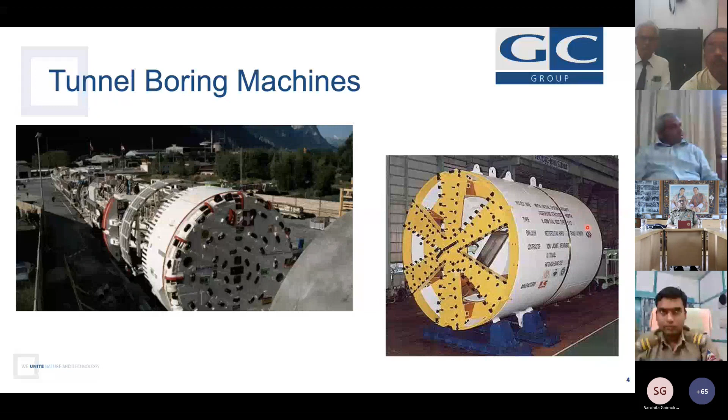Now, there is a whole range of TBMs, as we would call it. This shortcut DAUB means the German Association for Underground Works. They are part of the ITA, and they have already brought out some very comprehensive guidelines also on the choice of machines. And this is how they subdivide the different types of tunneling machines. I think this is generally accepted nowadays that this subdivision exists.

So we start on the top with tunnel boring machines. The first thing is the open tunnel boring machines, so-called gripper TBM, which would be used usually in hard rock. Then at the bottom here, we have the tunnel boring machines with a shield, or single shield machines, as they are called, for hard rock. So they are open machines. And then there is one thing which is very specific: so-called extension tunnel boring machines. This is when you have one smaller diameter and you extend it. For that, there are also specific machines. This I will not touch at all here because it's very specific and seldom used.

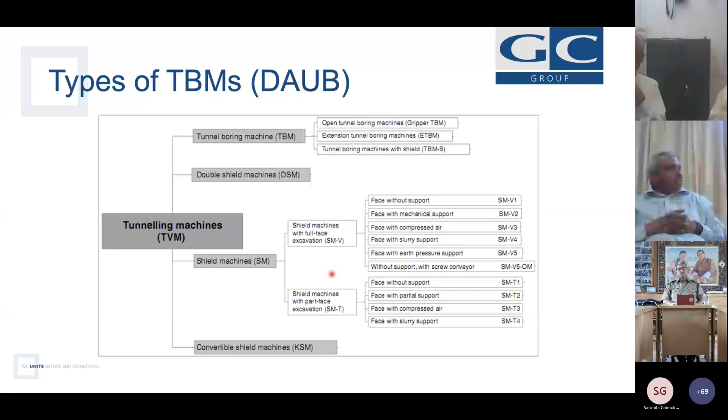Now this is what is called the classic open gripper TBM, which is used in hard rock tunneling. The specific thing is that the machine itself has grippers which fix the machine so that the machine can drill. Basically, the grippers are the abutment. They are pressed against the wall, the already excavated wall, and then the jacks are pushing the machine forwards. The cutter head is going through the rock. There is an overhead protection shield and an area here where rock bolts can be installed as a primary support. So it can be easily seen this machine has no segmental lining.

It can have a segmental lining, but it's not necessary. And the machine is pushing itself forward. So when these grippers are being retracted, these small feet stabilize the machine. The grippers are advanced, the whole thing advances, and the grippers again push against the wall. So this machine requires, because of that mode of working, very good rock. Because if the grippers cannot be fixed against the wall because the rock is too weak, then the whole machine will never come to performance.

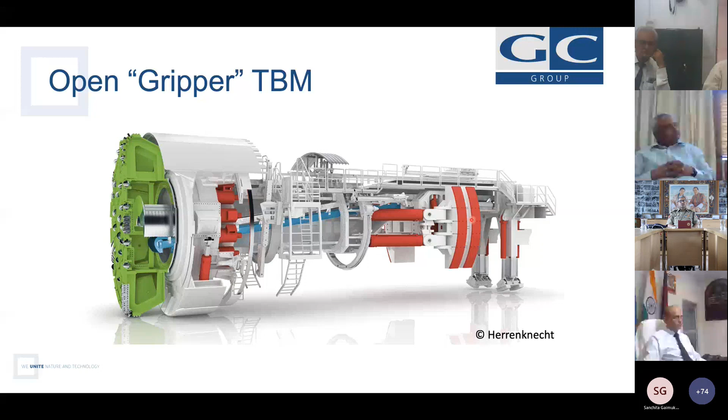Now this is the next type, already used in hard rock tunneling, the so-called single shield machine. Here we have segmental lining, and the machine gets its abutment for the driving from the segmental lining. So when this machine is used, a segmental lining is a must. I have to have it because it is integrated in my whole working, like in all the other machines. These machines are usually relatively short and strong. They can go through rock, mainly hard rock. What is definitely the difference from all the machines which are used for metro tunneling is that I have no face stabilization.

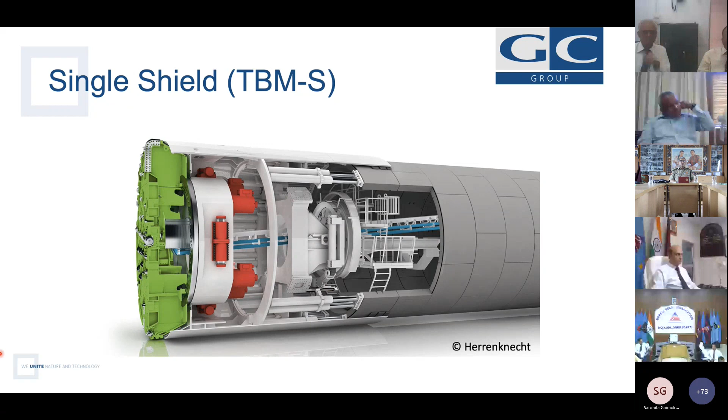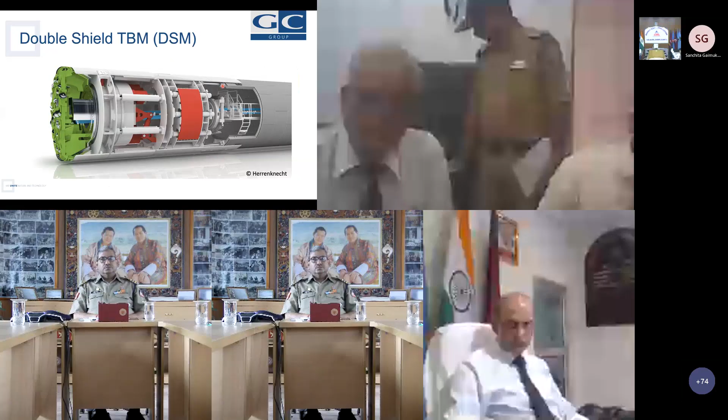Now coming to the next type, which is the so-called double shield machine. This type of machine is a mix between the classic single shield and an open TBM, because this machine has two shields and also a set of grippers. So this machine can work using the grippers against the wall. Then the grippers are fixed, the shield is pushed from the grippers forwards, and segment installation can be done in the back. But the segments are not necessarily used for pushing the machine forward. For that, we have the grippers. And if the rock is not favorable, so the grippers would not work, the machine can push.

Doctor. Actually, your screen is not being shared, I think.

What is happening? Oh, okay. Yeah, there was something. Okay, I'm sharing it again. No problem. I think now it's here again. Yes, now it's visible. Sorry, when did that happen? It just happened. Yeah. Okay, sorry. Okay.

Then very briefly, here are the grippers in the double shield. Here are the jacks, which can be used with the grippers for drilling. And here is another set of jacks, which can be retracted while the grippers are fixed. So segment building can go in one go during the drilling when the grippers are used. And if the condition of the ground is not good, one can also use the lining to push forward. The only shortcoming of that machine is that this shield is relatively long.

It's basically 2 shields. So if I have ground which has some time-dependent behavior, I need to have some measures so that the convergence will not catch my shield, especially the rear shield. Usually these shields are then a bit conical and the diameter reduces towards the end.

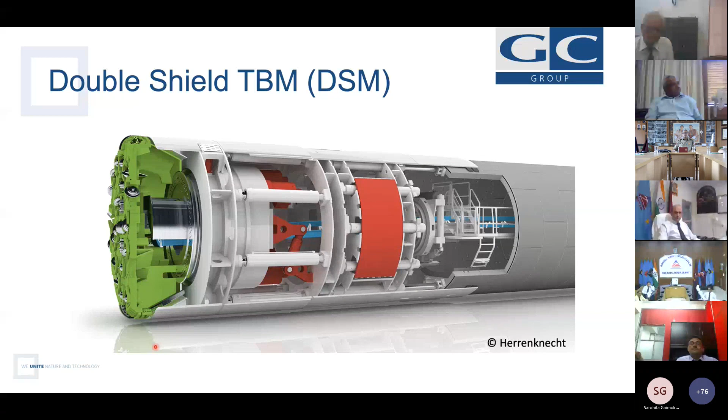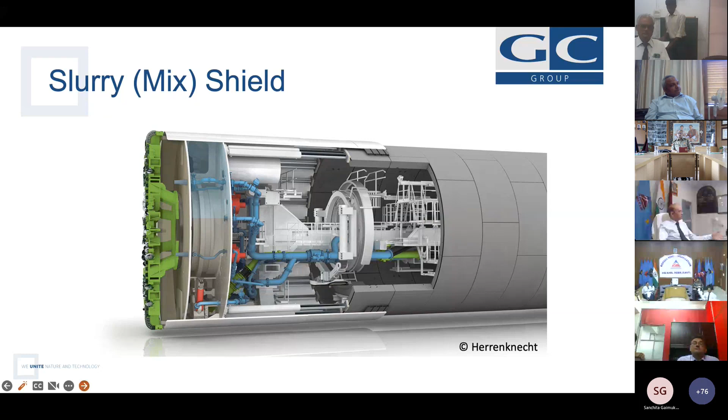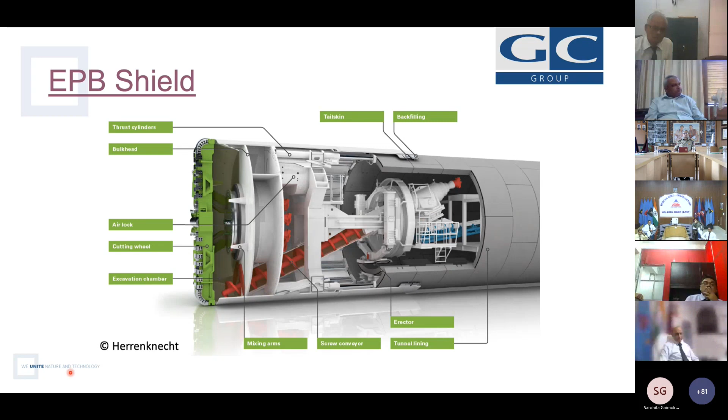On the other hand, as mentioned earlier, if I don't have water and I can go in open mode, then this is something I can do with the EPB, because if I have stable ground or rock in open mode and the rock is not too abrasive, I can muck it out with the screw conveyor also. Something that I cannot do with a slurry shield, which is always closed.

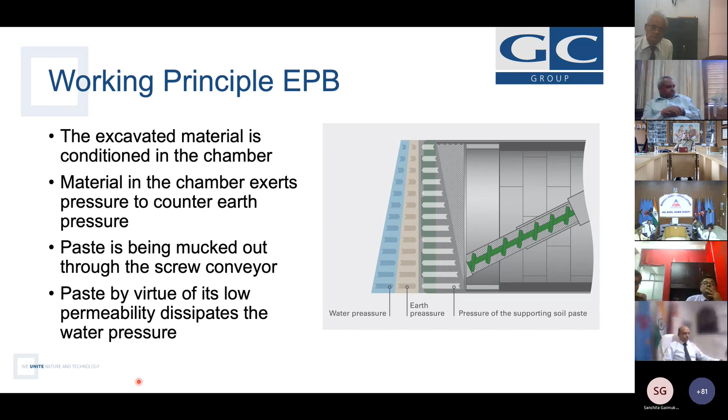So now, a short comparison, slurry or EPB. One thing is very clear. Slurry shields need a separation and treatment plant. EPBs do not need that. Then with the EPB, you're a bit more flexible with the mucking. With slurry shields, you have to muck through the pipes and they must be there. And depending on the ground condition, it can be that these pipes are also subject to wear and tear.

There was a project, not in India, outside India, where they had to basically do repair welding on the pipes because they were not there anymore. The material was so abrasive, and whenever you had a 90-degree bend, there was friction, and that took away the steel from the pipe.

And well, most probably because it is relatively simple to operate and also not much space consuming, EPB is the prevailing system that is used in India. So when you look into Delhi Metro, it was all EPBs. Mumbai Metro was EPBs and some other machines which had EPB mode and some other open mode. And I think only one lot used slurry shields. So one can say EPB is the more popular one, also coming from the constraints of space.

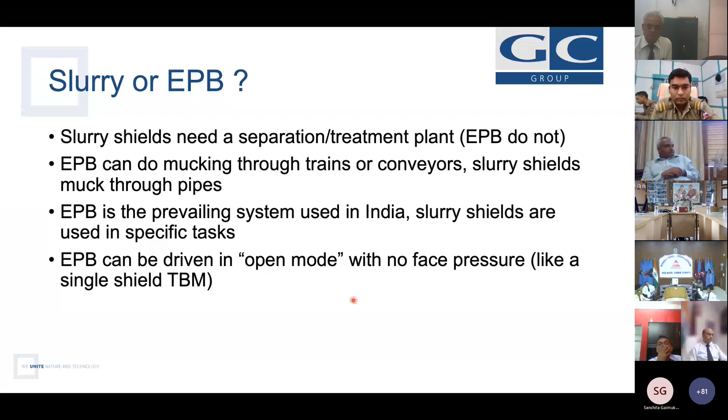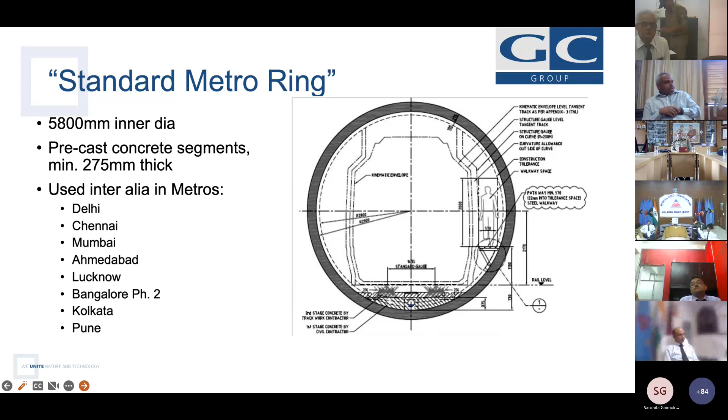Only minor deviations were there depending on the metro system. But this is how it looks like. It's more or less a standard SOD. So when it comes to this part, not much design study is required because these dimensions are already given. Only when requirements change, there might be a rework of that geometry. And usually segmental linings nowadays in metros are so-called universal rings. So basically I have a taper on the ring, which allows me to negotiate curves in horizontal and in vertical.

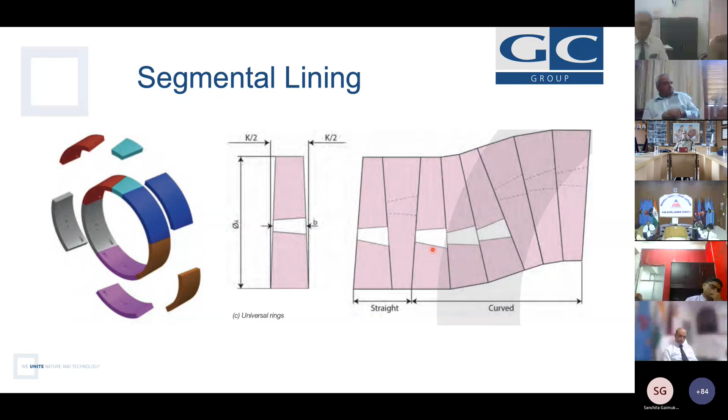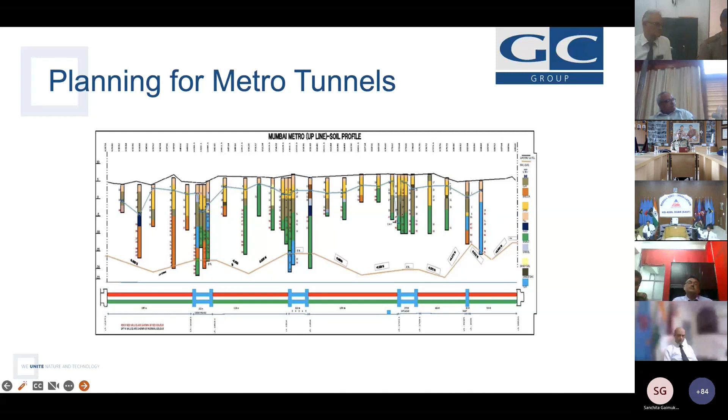So that's the first step, where the soil profile and the water levels are being drafted, being also shared with the contractors in the tender stage. The stations are being marked, and then contractors will start thinking, I mean, this is nothing to do with the geotechnical design, this is more logistics. How will I drive? And that is already an interface or a coordination work between the TBM contractor, the designer, especially for the launching and the retrieval, then the station designer, because he has to prepare each and every station for retrieval or launching.

Whatever space requirements are there have to be considered. So logistics play a heavy role in that whole driving sequence. And then comes also the decision whether you drive through or whether you basically retrieve a TBM and relaunch it. That makes a huge difference for the contractor. Maybe not for the designer of the TBM segmental lining, but for the contractor, it has a huge impact.

So, launching and retrieval is then done by separate shafts if it cannot be done as part of the station. This example shows Mumbai package 4, where in Siddhivinayak was one launching focus, and in St. Xavier was another launching focus.

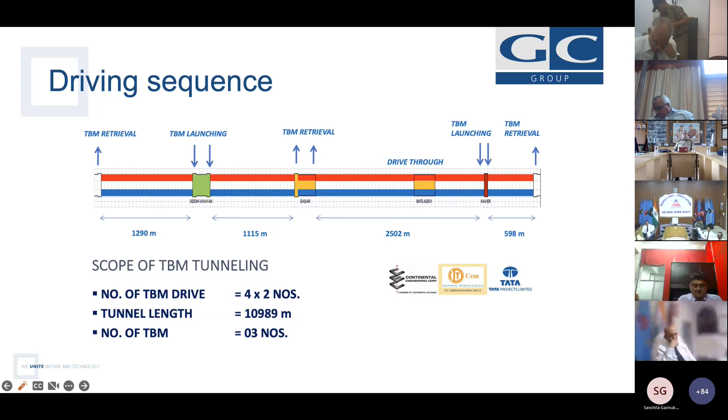And then, so to say, the point where the designers are coming in again. I mean, this L section is already stemming from a GIR, where all the drillings, the exploratory drillings, ground investigations are being collected, summarized, and put into a drawing. And not only this, in this drawing here there is a bit more inside, and I'm coming to that later. There are already recommended face pressures, maximum face pressures, tail void grouting, and air pressure for cutter head intervention shown. These are parameters which are coming from the design, as sort of recommended parameters, to give a range of values for a safe driving and safe intervention in the machine.

Because if you cannot, or if you don't keep that air pressure, the problem may be that you have water inflow, and depending on your ground, that water inflow may drag along also material. And in the worst case, instead of only maintaining your machine, you build a sinkhole slowly.

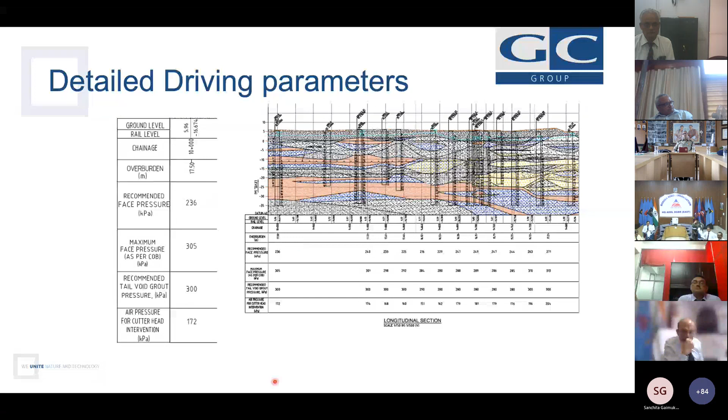Now, I think that was good enough for the introduction, and slowly coming to the metro tunneling. Now coming to the design tasks for the metro. I mean, we have two main things where the designer is putting his efforts in. One thing is the lining design, which is usually the more obvious, what everyone sees. But then we have also what I call the driving design, and that would be face pressures, grouting pressures, intervention air pressures, as already mentioned.

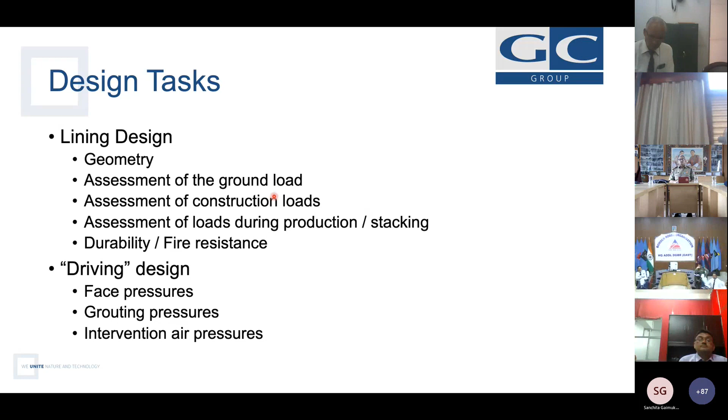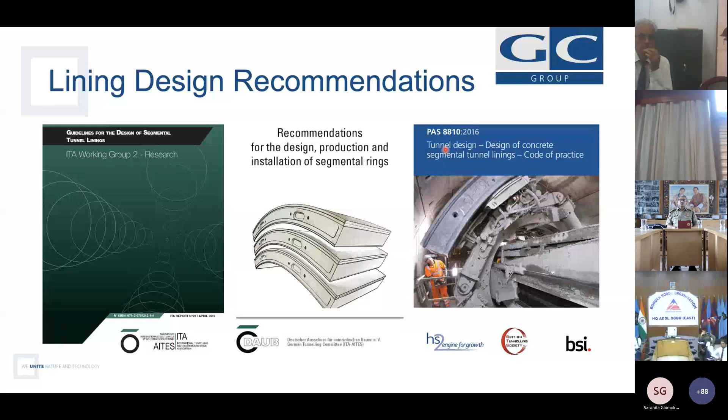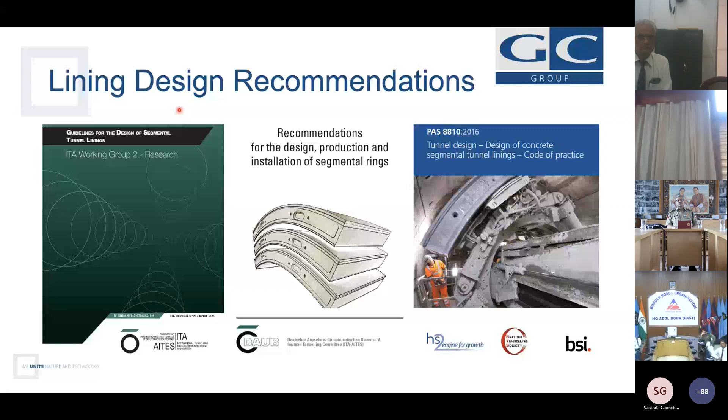Now, lining design, there is already a number of recommendations, and I can only recommend to go through them. ITA has published guidelines for the design of segmental tunnel lining. DAUB, which is also an ITA sub-organization, have produced recommendations for design, production, and installation. And there is a code of practice from the UK which is also dealing with the design of concrete segmental linings. So this topic is covered, and there is a number of sub reports which are there for precast linings with fibers, backfill grouting, etc., etc. So I would really recommend go to the ITA website because there is a really big collection of up-to-date papers.

Now, from the ITA guideline, lining design, what is to be considered? So it's not that we only look at the lining design like we would do in a cast in situ lining, where we look at the final product mainly, but here we have production and transient stages, which have to be considered in the design. Because it starts when we demold the segment, there will be forces on the segment during the storage, during transportation, during handling. And then this all is covered by some load factors, which ITA is proposing.

Then comes, after production, the construction stage. Now all our machines are pushing against the lining. So the thrust jack forces are one of the decisive loadings for our tunnel lining. Then come tailskin back grouting pressures, secondary grouting pressures, and in some cases, the TBM backup load, because behind the shield there is another 100 meters of backup with many equipments.

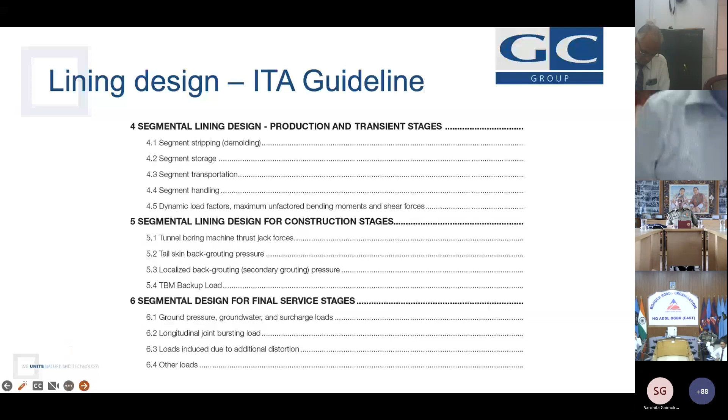And then under point 6, finally, we come to what we would usually see in the geotechnical design as our lining design. That is then the ground pressures, groundwater surcharges. Then in the radial joints or longitudinal joints, the bursting loads that are to be looked into so that they are not damaged. Loads induced due to additional distortions, that is to be seen always, depends on the driving, and other loads. So compared to a normal design of a cast in situ lining, we have two big areas which are, so to say, extra.

Now coming to that, we have the demolding done here with a vacuum lifter. Again, these forces have to be checked on green concrete. That's the thing where the concrete has no strength whatsoever, or very little, let's put it like this. Then comes the stacking. How much distance is there between the blocks so that there is no issue with the segment?

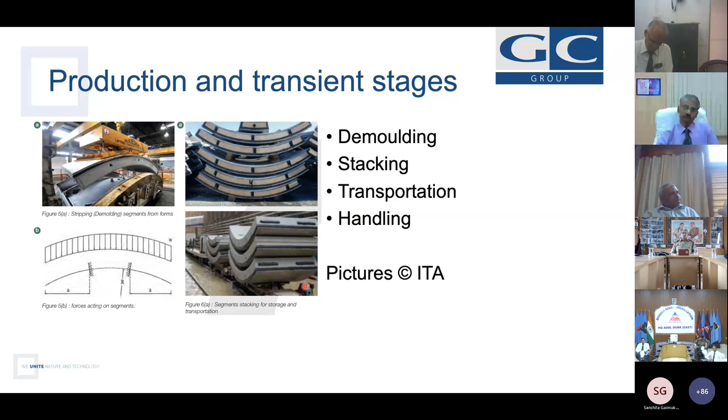Transportation and handling is basically to look also into these inserts which are there. Now, coming to the thrust jack forces, it's actually very simple what these forces are.

I'm having groups of jacks which are basically pushing my machine forward, and they are pushing against the rings. So I have relatively high forces introduced locally, and the segments should not break when under load. That means that I do have a development of stresses which I have to get under control.

And as written in the guideline, there are simplified approaches, there are diagrams, and even finite element analysis to get an idea how these jacking forces will load the segment and where I have stresses which are, so to say, disadvantageous for my concrete, because I'm still using concrete for my segments.

Concrete has a very good compressive strength. So in compression, there is usually no issue with these jacking forces. But then, together with the compression forces, tensile forces will develop. And that is the so-called tensile loading that has to be countered. Concrete itself, especially higher quality concrete, has a tensile strength. So in many cases, this is sufficient.

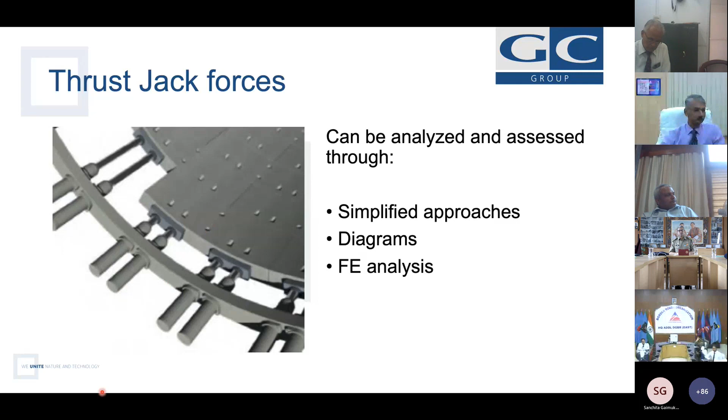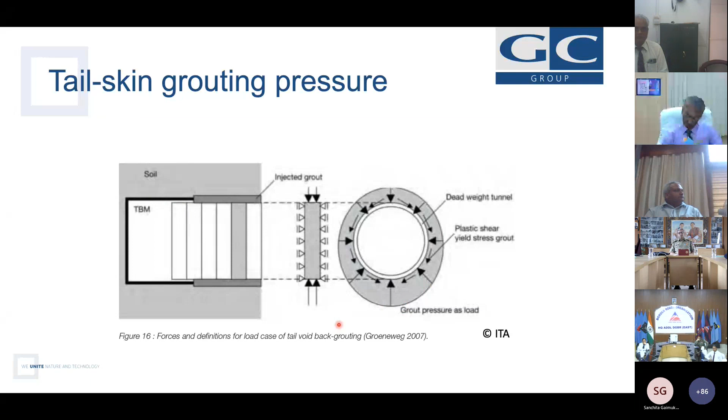Now the tail skin grouting pressure is shown here as a diagram, and usually it is not a very decisive load case because it is quite uniform, and in many cases this load case is already covered with the normal ground load. So good to check, but in this specific case, it will not have much impact. Let's put it like this: there are more decisive load cases, but there's one more important as a load case, and that is basically

And when you look at this, it becomes very clear that this also helps to mitigate settlements. Because if I'm having some voids and cavities above my tunnel, over time it will be filled with material, and that material can only come from above. So that means it will settle downwards. A proper backfill grouting can do some mitigation on the settlements also.

And the secondary grouting is usually done through the rings. There is a grout plug, which is at the same time a lifting socket for installation, and which has also a non-return valve, and through that grout is being applied to fill whatever voids are there around the segment. And each segment has one grout plug, so one can not only take one position, one can in total have 6 positions where you can grout.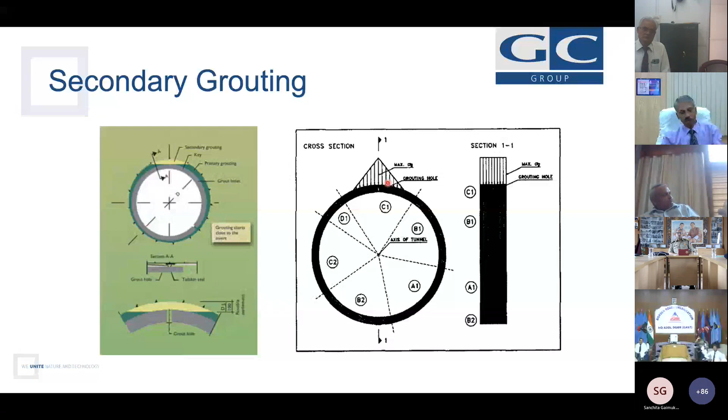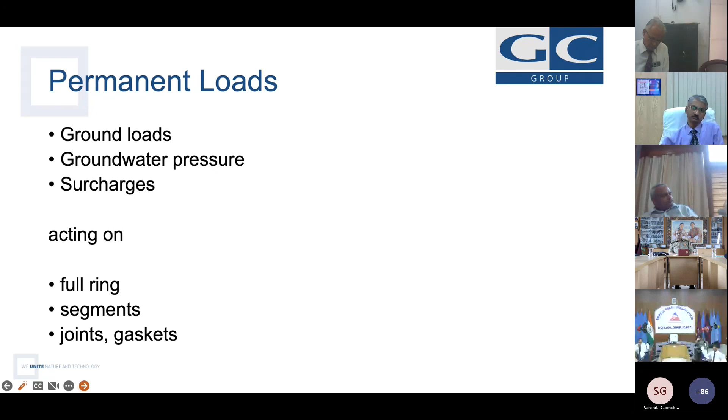Now coming to the permanent loads, which are there, like groundwater pressure, any surcharges, which is again something very specific for urban tunneling, that I have to assume that buildings are above my tunnel or buildings might be built on top of my tunnel, and they are acting on the full ring, on the single segment, and on the joints and gaskets. So all these have to be checked.

So now coming to the ground loads, there is some difference compared to what would be called the normal mountain tunneling outside the cities, because in many metro contracts, the ground load is to be taken fully. So that means there is no relaxation permissible. What we do in rock tunneling, that we say, okay, we let the material relax even in our design calculations, is not admissible in many of the major employers' requirements.

Then, when we take this whole thing one step further, the overburden and the coefficient of side pressure, the K0, determine our stress level, and also the uniformity in the sense that I'm having horizontal stresses and vertical stresses. And at the end, I'm having a segment ring which has to balance out these two stresses.

And one thing that I think cannot be overemphasized is that the subgrade reaction modulus, so to say, a value that is governed by the ground, by the stiffness modulus of the ground, the radius of the tunnel, and in some approaches also the Poisson's ratio of the ground, is another very, very important factor, because it basically describes what resistance segments would meet when they try to push into the ground.

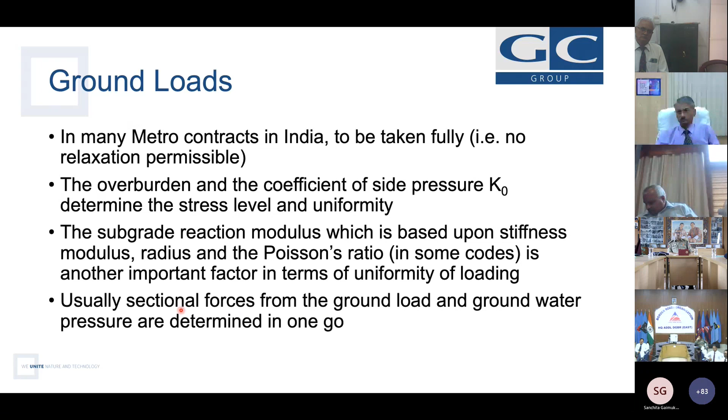Now, the accepted procedures which are being used for these calculations is in all cases an analytical approach, the so-called Muir-Wood equations. It's a paper from 1975 with a discussion contribution also from another engineer, Mr. Curtis. And in the German-speaking countries also there is a publication or several publications from Mr. Duddeck and Mr. Erdmann. These two gentlemen also had developed an analytical approach to determine the sectional forces in the lining. So the bending moment and the normal force.

Then the other accepted procedure is to make a beam spring model with any structural software, whatever is available. And one of the standards nowadays is that we have a numerical calculation either with finite elements or with finite differences to see what is the load and the sectional forces coming from that loading onto the ring. I have to say this is all on the level of the ring. There is no requirement to model each and every segment separately. And it would also not make too much sense because we have quite a good number of positions. So one has to run several analyses with no additional gain.

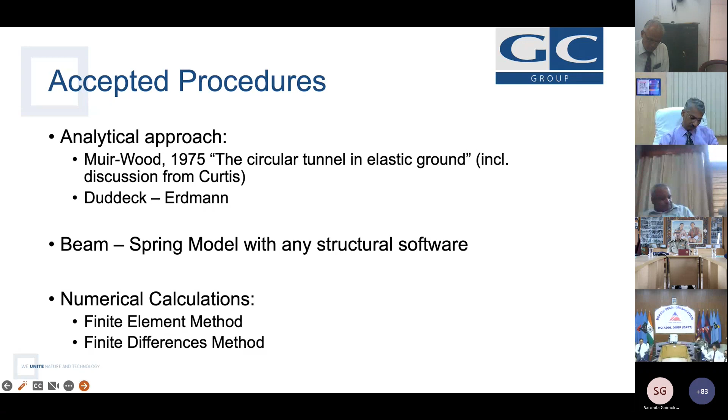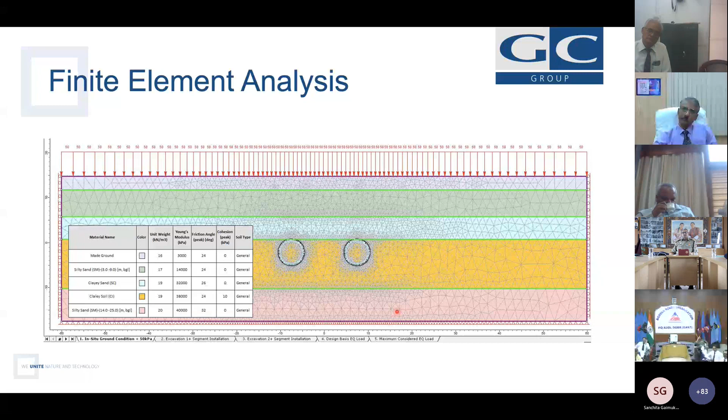So now coming to finite element analysis, this is the model for the twin tunnel before anything happened. Already the surcharge is shown, which is 50 kPa, which is a standard value in many metro requirements. And then we have, so to say, also shown here nicely the different ground conditions which are there with the material parameters, unit weight, etc. And that, so to say, would be the starting point for the calculations. And at the end of the day, as you might have seen already, this is the result.

In this case here, it's about the bending moment in two adjacent tunnels. This is something which can be done with the finite elements much better than with any analytical solution, because I can assess what happens in the first drive. Say that right-hand tunnel was the first drive. The first drive tunnel will get a bit more loading than the second drive because whatever changes between first and second drive must be endured by the lining of the first drive.

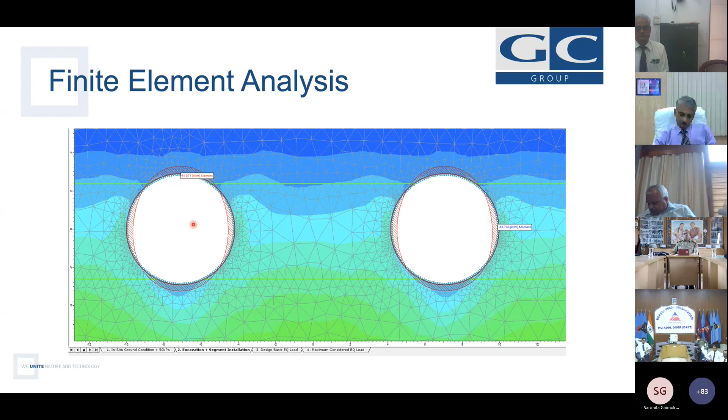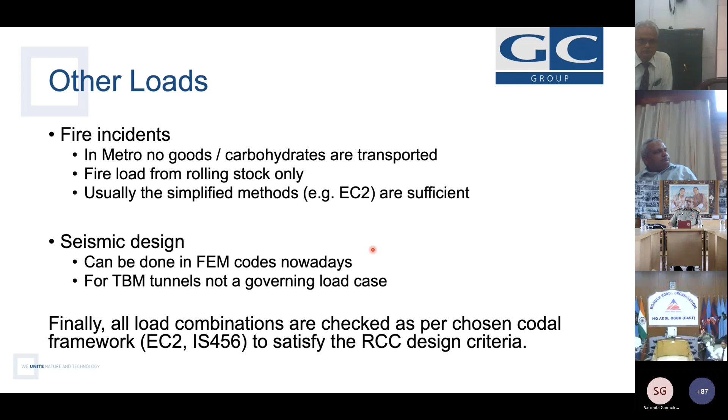Then the other point is definitely, well, sometimes under discussion, but seismic design is also there. And for that, again, the finite element codes do have some algorithms for seismic design. Usually it's not the governing load case for tunnels, also not for TBM tunnels, but it will be considered and should be considered to have everything in place and everything checked. Because it could be that we have local overloading, but no major instabilities.

So, once all these loads are being analyzed, being assessed, it's all put together in different load combinations, and they are then checked as per whichever codal framework is chosen. I mean, Eurocode is acceptable in many places, and the Indian standard for concrete can also be used for most of the cases to satisfy then overall the reinforced concrete design criteria. So these things have to be taken into account, because the next step is then durability considerations.

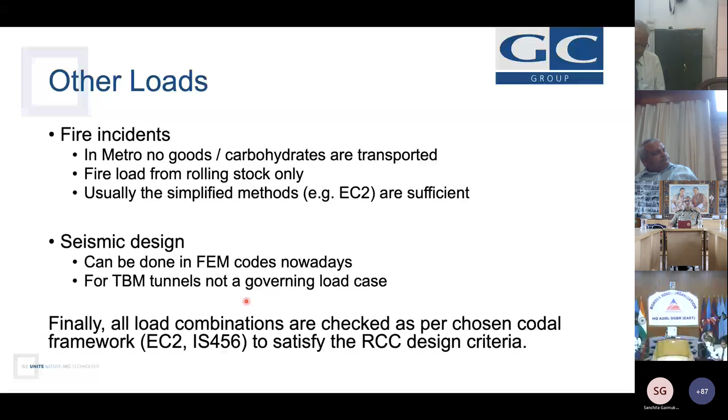I mean, metro tunnels are exposed to sometimes harsh environmental conditions, not in terms of temperatures, but in terms of chemistry. I mean, just imagine Pune and Mumbai, where you have salt water around, where you even have a little bit of salt in the air. So that has to be considered. The design life is 100 years. You cannot just repair somewhere below buildings, will not work. So concrete degradation and the corrosion of the reinforcement have to be mitigated. That has to be looked into. And the durability of the structures has to be ensured.

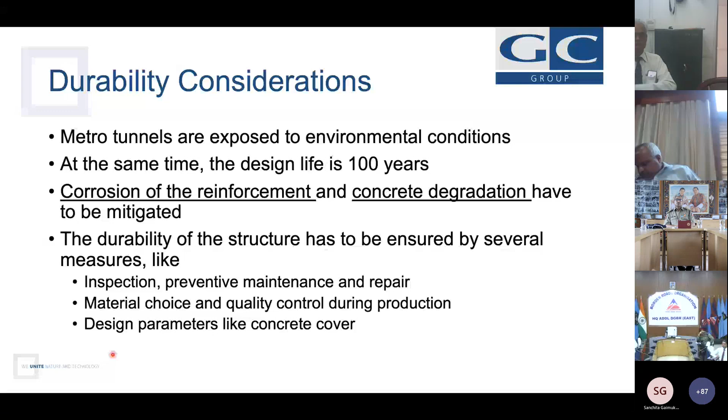And there are several measures. One thing is definitely inspection, preventive maintenance, and repair, which is something standard. Then the next point is material choice and quality control during production. That to some part touches the design, and then come things which are, so to say, directly in the realm of the designer, that is design parameters like the concrete cover, concrete mix designs, recommendations in this regard. And so there are codes which prescribe minimum covers. That is in the European code, the EN 206. And the British standard has the so-called BS 8500, which is, so to say, complementary to the Eurocode.

And there, basically, one is walking through a procedure where first the exposures are being defined. So am I in a saltwater environment? Am I in a marine environment? Am I in a normal environment? And from there, the whole process starts and one gets into the different exposure classes. And each exposure class then, together with the concrete strength class, will give minimum nominal cover, which has to be taken into account. Also cement qualities and cement types are being defined on that. This is quite a comprehensive document. And with that, going through that, already certain decisions can be taken.

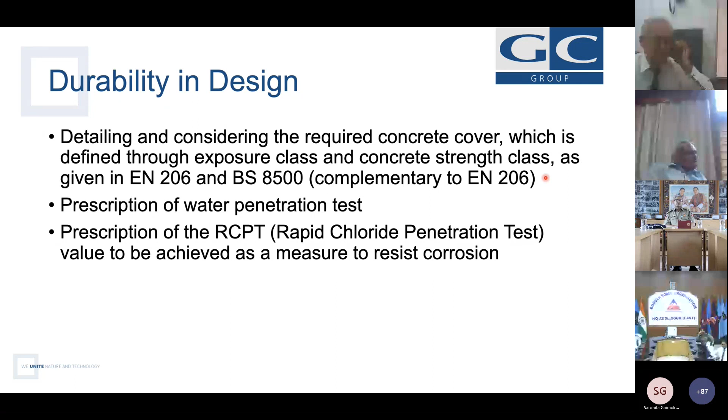Then comes the water penetration test, which was earlier always a DIN code. Then there can be in the specifications values prescribed for the rapid chloride penetration test, which is basically a test to see how deep chlorides can penetrate into the concrete. And usually that RCPT value is linked to the use of certain admixtures and components in the concrete, like silica fume, to ramp up the resistance against chloride penetration.

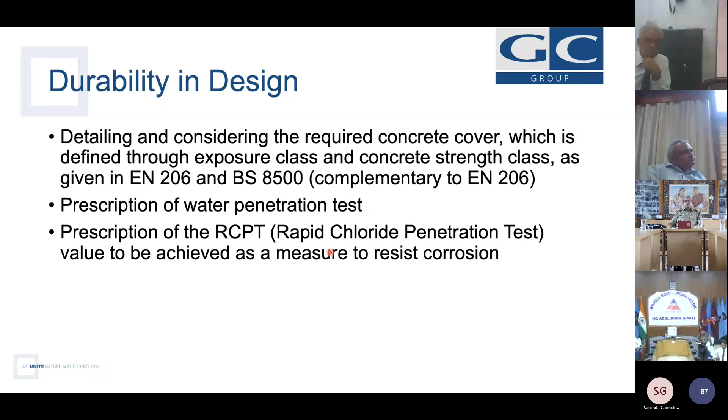These are also usually given in the employer's requirements. And then, when all this is done as per the codal provision, it may happen that clients ask for a durability analysis, and there is a software tool. The name is mentioned here. It's Life-365. It's free of cost. You can download it from the internet, and it basically allows you to analyze when you have a concrete cover

and the thickness of a wall to see at what time the chlorides will penetrate so much that they induce corrosion. And based on that, the design life can be estimated. I mean, the whole background is coming from the International Concrete Federation, FIB, but this is the tool which can be used by the designer.

And you can see that here the base case was normal concrete, and in the alternative, the water cement ratio was reduced. There was slag added, silica fume added, and then the design life went up. Here the numerical values are 150 years plus, but it basically means that from the probabilistics, there will not be corrosion in that depth at a certain point of time.

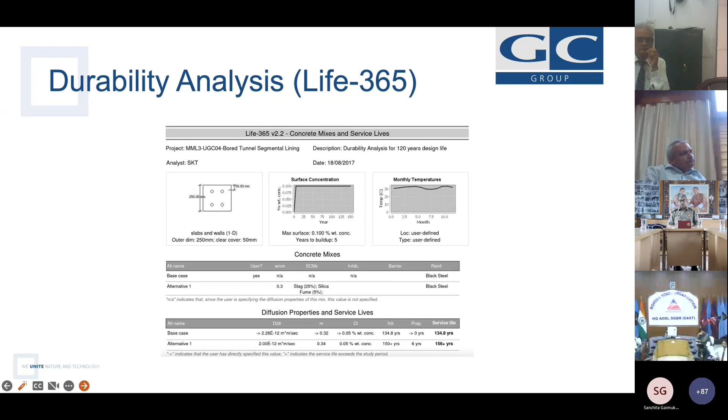Now we have checked the ring. Now we have to go one step down. The bolts have to be checked, or whatever connectors there are, on tension and shear. The erector socket has to be checked whether it's stable. The gasket pressures have to be checked in two ways, in terms of geometry and in terms of load induced through the compressed gaskets.

So this highlights how complex a precast lining is at the end of the day, because I have molds which are unchangeable. Once they are defined, they are like this. The molds define the geometries of the joints where the gaskets will be put in. Now, this cannot be changed. What can be changed is the gasket material. There are gasket suppliers who have relatively stiff gaskets and suppliers who have softer gaskets. And it makes a huge difference, because a softer gasket will not develop that strong resistance against compression. That means the load for the design is also less.

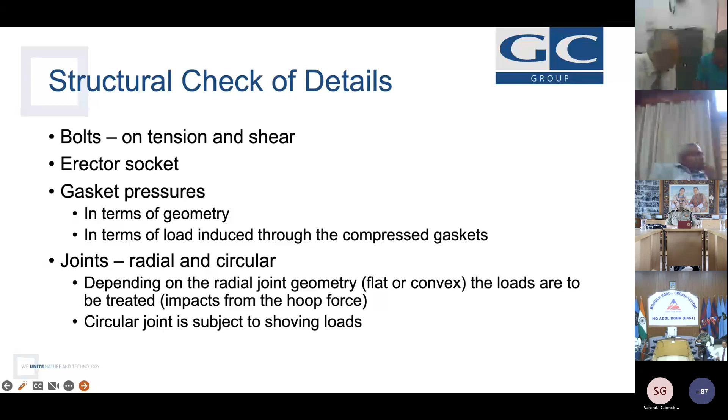And when you think of the two rings being pushed together with the gaskets there, it makes a difference if the gasket develops, say, 20% less strength, because at the point after the ring has been erected, the bolts are fixed. If my bolts on tension cannot take the loads coming from the gaskets, because eventually the jacks will be retracted and the load will go onto the bolts, then I may have a little bit of a problem. The other thing would be in the radial joints, that the compressed gaskets exert too much shear force onto my segment, and it may break. So this at least has to be checked, that it fits into the whole system.

And then one quite important structural check is to check the joints, the radial joints and the circular joints. The circular ones are basically subject to shoving loads. Their governing load cases are usually over. But the radial joints, sometimes called longitudinal joints, have loads coming from the groundwater, because all the hoop forces in the segment are transferred, or not, through this joint.

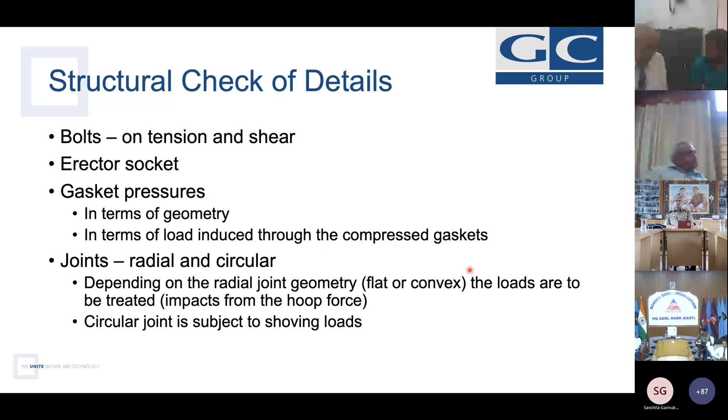Because if I have bird's mouthing, as this is called, where the joints open like a bird's mouth, I get concentrated loads in one place, and then I might have trouble transferring the loads from one segment to the other.

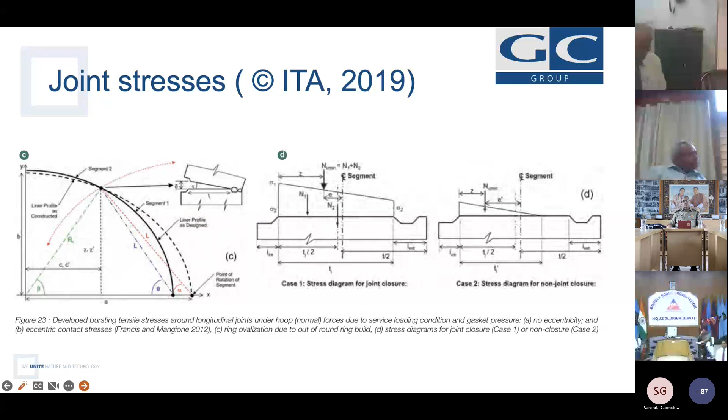Now, one thing that is done very often in metro tunneling is that we take a convex joint. You can see it only very slightly. The two ends, also in the molds, are convex. So if there is a slight rotation around the point where the bolt is sitting, there will be no moment introduced. It will still be a contact force. So the design then has to go for a concentrated force transfer, but I'm not getting bending moments inside like in a flat joint. This is very common in metro tunneling: convex joints allow a little bit of flexibility and take advantage of the concrete compressive strength.

And you can see here what I said earlier, this gasket groove, which is also compressed. You can imagine that when there is a load coming here and here, it may break out. Just sketch it in. So the loads would be in this direction, but the breaking out could happen somehow like this or like this. And that is not good at all. That's why this has to be checked when the design is done. It's a detail check, but it has to be done.

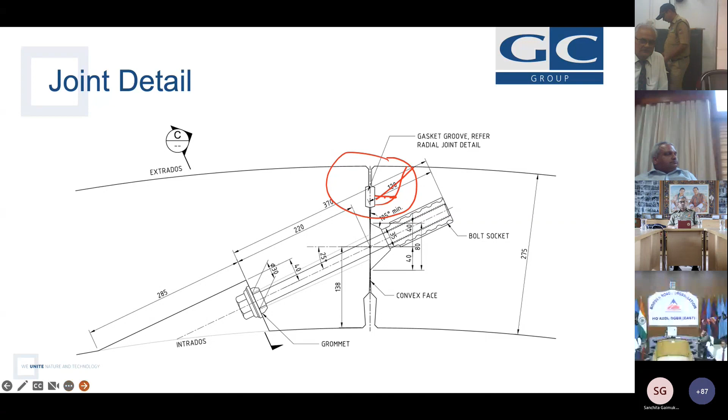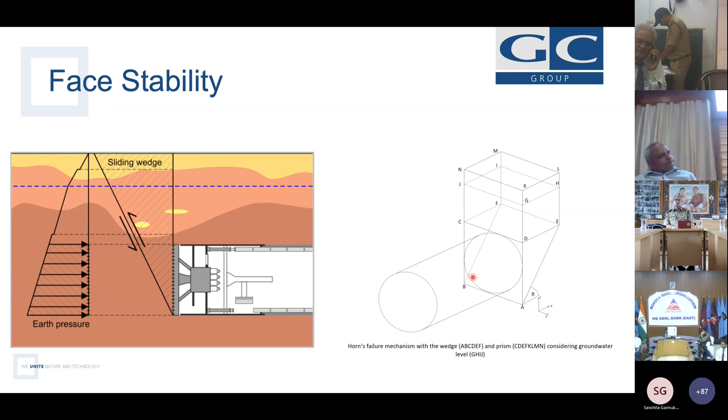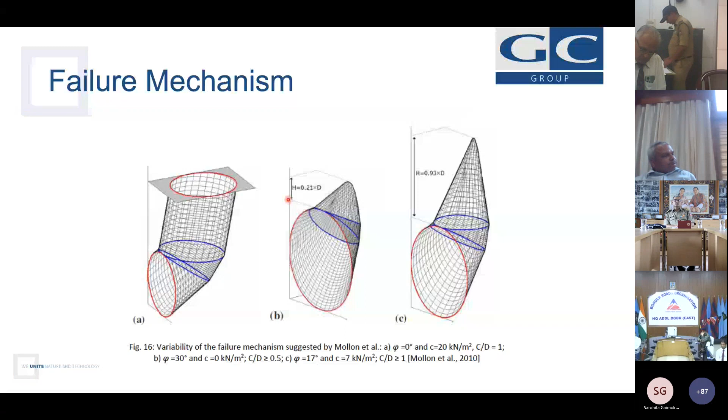More complex studies have been done for failure mechanisms, which are variable because in the first one we have cohesion, in the last one very little cohesion, and in the middle one no cohesion at all. This would be like in sand, where the failure mechanism looks like this, and in clay material it can look like this. These are studies which came up later, but at the end of the day, wherever this red circle, which represents the face, is, we have to apply enough counter pressure to not let the ground collapse or become unstable. This is, for example, not an issue for any rock TBM, only in soil.

At the end of the day, I come up with a range of face pressures. The lower limit pressure basically comes from an active earth pressure coefficient. Then I have my operational range with certain deviations, which I have to get under control, but which are there. The upper limit of pressure is basically to avoid any breakup and blowout. If I go further up with the pressure, which is feasible because I can push my shield in and not let any material come out of the screw conveyor, for example, then I can even have a passive failure and heave on top of the tunnel. You will not really get this with a slurry shield because you have blowout earlier. But with an EPB, if you don't let any material out, you can end up in such a situation.

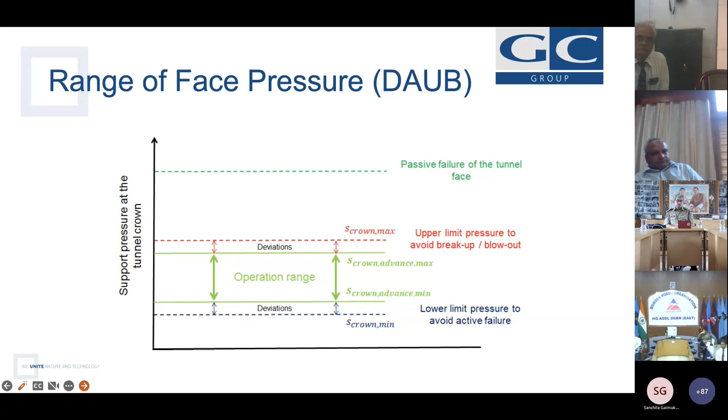However, from the design end, what we want is to have the face pressure in the operating range. Here it's given at the tunnel crown. Usually there are at least three sensors, one in the crown, one in the sidewall, one in the invert, to see how the face pressures are developing during driving. This would be one diagram showing how to calculate all these forces on the face wedge. It's taken from a DAUB guideline, which is a guideline only for the determination of face pressures. So you can see what is all taken into account. We have the vertical load from the ground, and we have the water pressure.

There is, and that is shown by these arched arrows, a sort of arching or silo effect, which can be taken into account if you do the determination of the vertical stresses with the Terzaghi formula. Then you have a sort of silo effect already inside. And then the different values coming from ground parameters like friction and cohesion, which all in all together will give, so to say, a balance of forces which has to be kept.

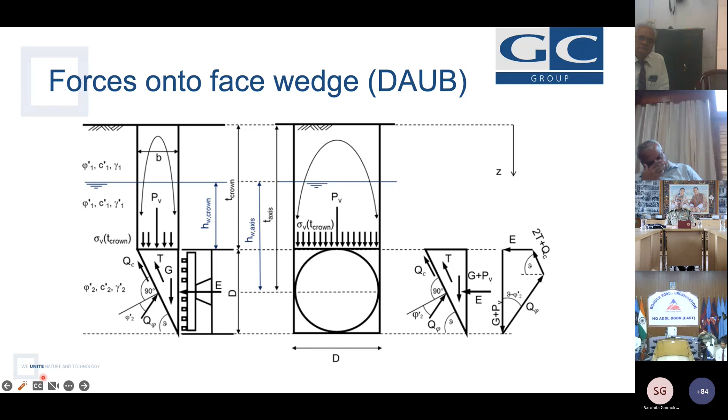Now, one thing that is coming and which is not shown here: some formulas, also the formulas of Anagnostou and Kovári, take into account some seepage forces, because at the end of the day you can be completely watertight, but you can have a little bit of seepage, and seepage means also seepage forces, which on the other hand will reduce the water pressure at the face, but you will still have the vertical pressure. So this has to be taken into account, and also what is allowable in that.

So these are the recommendations for support pressure calculations, and then the two main papers which are generally accepted. There is even more in that guideline, which is comparatively new. Let's put it like this. You can find other approaches also, but Anagnostou and Kovári are in this respect a reference for the face pressure calculation.

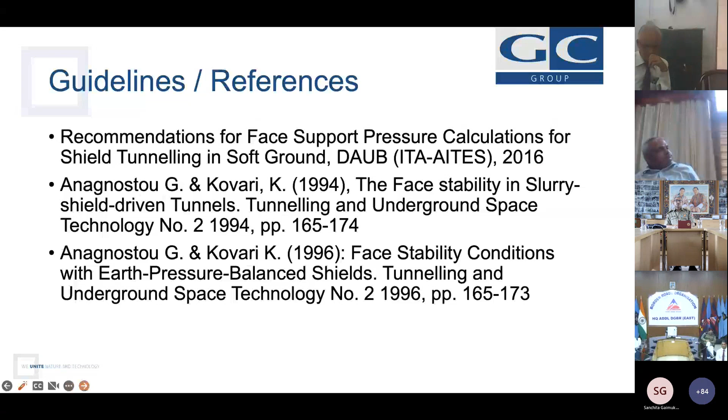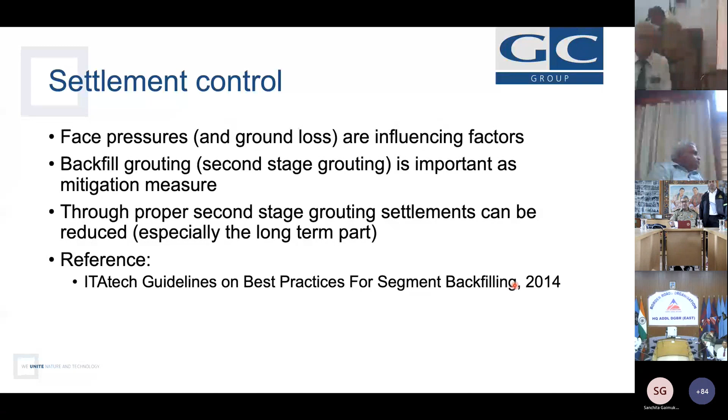And now if we think only in cross sections, we may overlook the importance of the segment backfilling. But not only settlement control: also when we go back to the whole segment design and the design checks, consider that I have a segment that is more or less fixed. If the segments are not backfilled properly or something happened, the whole loading scenario will change in a manner which is very difficult to grasp in a design, and also in a manner which, when you take these loads as inputs, will be difficult to really make an economical design then. So that's why the whole system must work together very well.

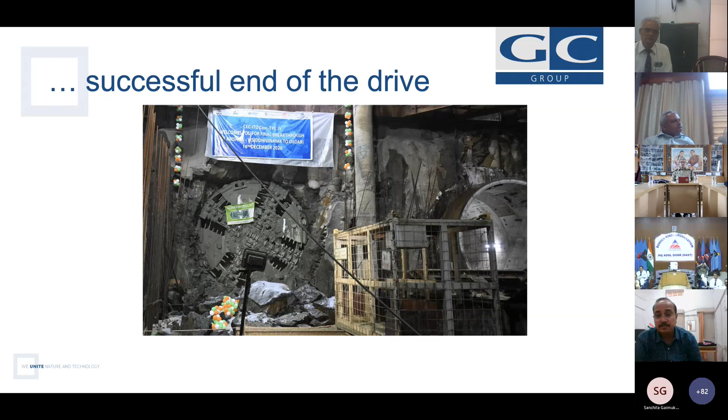What was the other? Cross passage junctions. How are they modeled? Well, there is one thing that is usually done: you model them in STAAD Pro or any software. You could model them in 3D finite elements, but it will not help very much. Usually we take the forces from the rings and put them onto the steel frame, which is integrated into that opening.

So in metro tunneling, you basically have first the rings to support adjacent segments. You open one segment ring, maybe you open 1.5 rings, which means you cut a little bit into the other segments, and then you put in a steel support ring as a final support, which transfers the loads, and that's how the whole thing is modeled.

Yeah, the next question is from Mr. Tushar. So I think there was one question about the drive-through procedure, or is that already clarified? Yeah, we have from Mr. Siddharth: brief about the TBM drive-through procedure adopted for passing through UG stations.

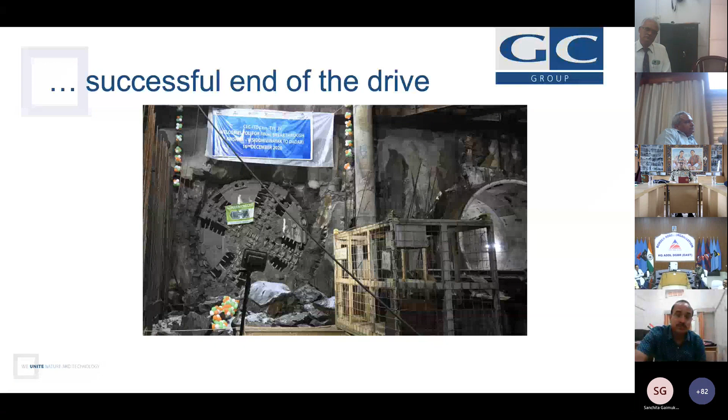That was again something different, because then we had the normal driving, but had later on to verify through design what measures are to be taken so that the tunnel will remain stable. It was nothing really big at that time. So this is for the real drive-through procedure. Usually you would have your D-walls ready, your station box, but you have not excavated it. And then you drive through.

So from the segment point of view, it's not a big deal, because the segments will be taken out later on and usually even broken. So if we know it, we can put in sacrificial segments with lesser specs.

And regarding this SOD, that is a very good question. In India, there was a time when every client had a different walkway width. Now it's being standardized slowly. So if the client gives the SOD, then this is to be followed. So you may find different drawings on different metros because it's also an evolution.

And we have the question about face pressure calculation, also done by the Proctor and White method. So I think it's just a reference, I guess. And any recommended pressure range for backfill grouting in EPB TBM tunneling?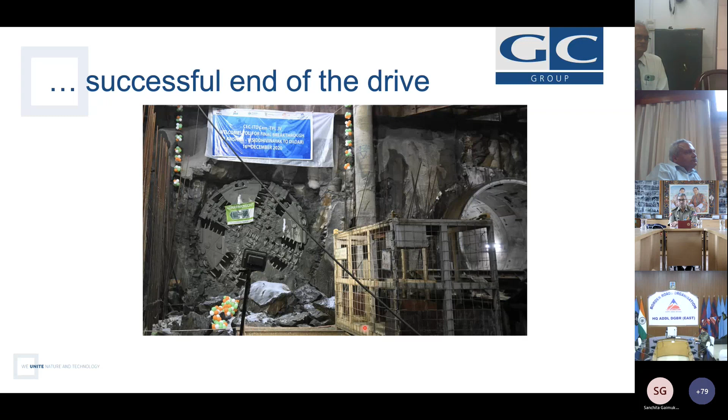The slurry machine, it's the cutter head. If I expect some hard strata or some rock, then I would have a cutter head for rock, and then we will not get stuck. I think my screen is still visible. I will just try to go back to this thing with the cutter heads. Yeah, if I have such a cutter head, I can go through hard strata.

And the main issue is usually not the strata. It's an issue, but if I have a uniform hard strata, I'm well off. If I have a uniform soft strata, I also have no problem. If I have mixed strata, then I have a problem, because then half of the cutter head, maybe even diagonally down, is hard rock, and this part is soft soil. That can be very tricky to solve, because I need enough pressure to keep the soft soil in place, and on the other hand, my main counter forces are coming from the hard material, from the rock.

But still, it has been done. And the slurry machine is actually a good machine for hard rock. So if the cutter head is prepared for that, then we will not get stuck. We will get stuck when we have a soil cutter head and hit rock.